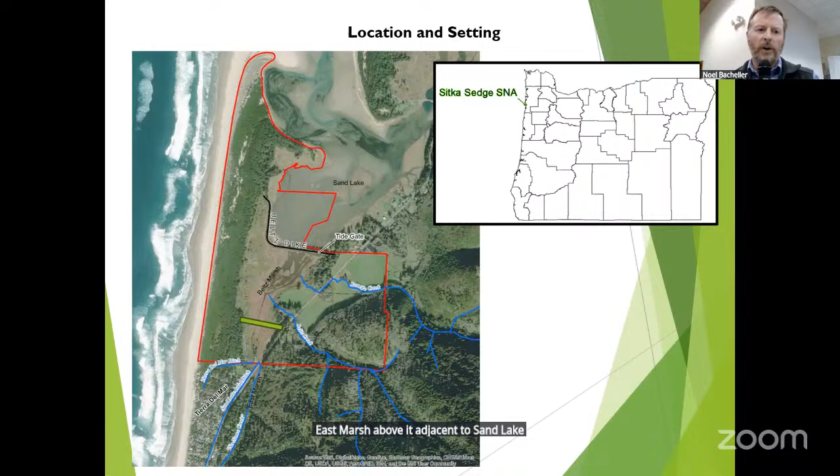Reneke Creek is the northernmost creek flowing into Beltz Marsh. Beltz Creek is the next one down. No Name Creek here from the south. East Marsh above it, adjacent to Sand Lake Road. Tierra del Mar Ditch running along Sand Lake Road through Tierra del Mar, and again up here on the north end of Tierra del Mar. The community of Tierra del Mar is to the south of the red park boundary, and Sand Lake Estuary is to the north.

Now if I can get it to move.

Okay, on this slide, this is the existing tide gate in the 1930s vintage dike. The opening of this concrete box culvert is about 4 foot by 4 foot, and it has a vertical hinged tide gate. This tide gate is missing all of the boards, so water is able to rush through here like crazy. The amount of water that flushes through during a high tide or a receding water event from stormwater behind the dike is very fast because of how small this hole is in the dike.

It's like a fire hose. It's causing all kinds of eddies and bubbles and foam. What you can see in this picture on the bottom is that these eddies, because of the excessive speed of the water, have eaten away at the inside of the dike. The dike used to go all the way out here to these wing walls, and it's been eaten away mostly in the last 20 years since the boards on the tide gate flap started to fail.

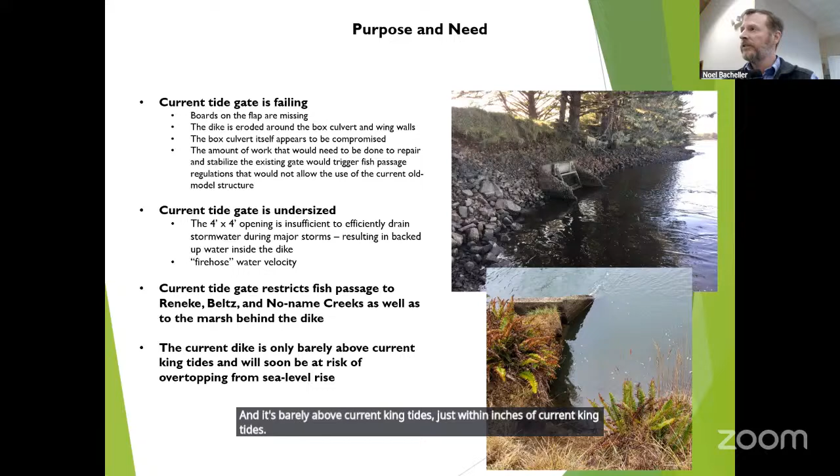So what has been done over the years? I'm not going to read all of these things here, but a lot of work has been done in the last 11 years on this property in general, and specifically also looking at what the options are for dealing with the situation with the failing dike. The property was acquired in 2014, and shortly thereafter a lot of planning started, including assessments of habitat, recreation needs, scenic resources, cultural resources, everything under the sun. We really found out early on that there was a real strong need for hydrological analysis.

So in 2016 through 2019, we had two separate highly detailed hydrological studies take place that characterized how the water flows inside and outside of the dike, what the effects would be under different alternatives, and how to weigh those alternatives against each other.

In 2020, we made a decision to look at the setback dike as the preferred alternative. And then 2020 kind of pulled the rug out from under us. We had no funding for a while there, and we quickly forged this relationship, a great relationship with Tillamook Estuaries Partnership, to look for other ways of funding the project and continue to move it forward. Tillamook Estuaries Partnership was able to receive grant funding that allowed them to pick up the pieces and start to move forward with the planning.

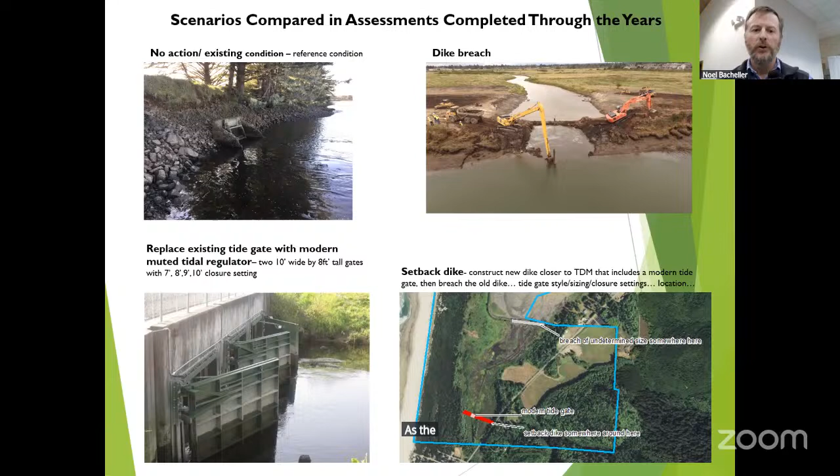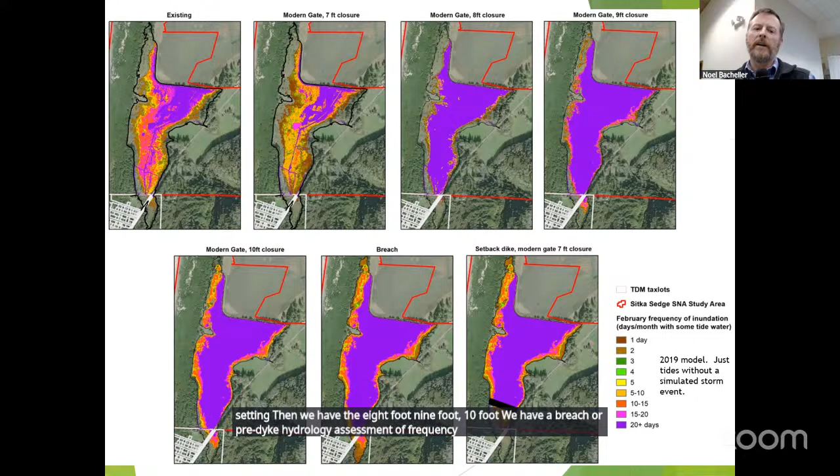In the upper left is the existing condition, then the modern tide gate with a 7-foot closure setting, or 'toilet float' closure setting. Then we have the 8-foot, 9-foot, and 10-foot settings. We have a breach or pre-dike hydrology assessment of frequency, and then the setback dike here, represented by this black bar.

The colors are a little hard to read, at least on my screen, but the green line is the existing condition, the blue line is the outside of the dike, or the breach situation, and the truncated ones—the red and maybe purple—are the modern tide gate and setback dike alternatives. The blue shading down here is a major rainfall event, something like a 100-year rain event—a pretty significant storm—and these tides are also pretty tall.

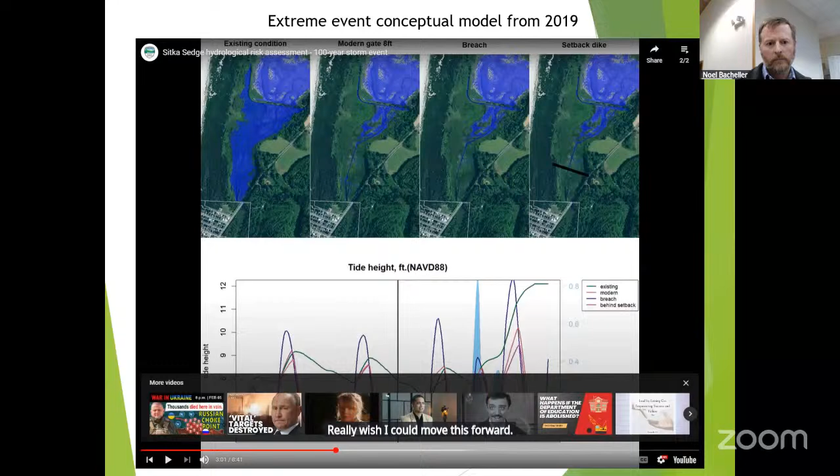Really wish I could move this forward. Well, we can demonstrate it before. I'll talk about it as it continues to move. I'm sorry, everyone, I'm not able to move it forward because of the YouTube portion here.

But now watch this tide here. This is a 10.5-foot tide. Notice that the maximum penetration into private property is highest in the breach scenario, and it's attenuated by both the modern tide gate in the existing dike as well as the setback dike. You'll see in these scenarios that the setback dike actually improves on the hydrology, or the amount of water that reaches Tierra del Mar, significantly relative to the modern tide gate scenario.

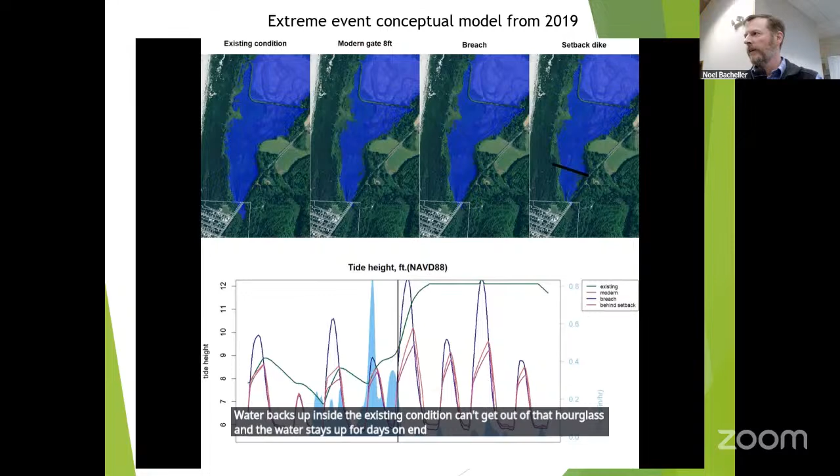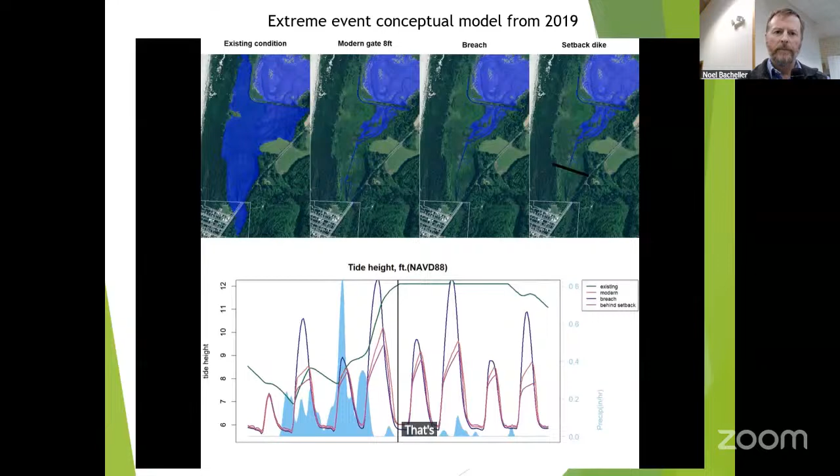Again, once we hit this major 100-year storm event, water backs up inside the existing condition, can't get out of that hourglass, and the water stays up for days on end, sometimes overtopping Sand Lake Road at No Name Creek. So here's the 12.2-foot tide. You'll see this penetration up into private property near Tierra del Mar was maximized under the breach, lesser in the setback dike than in the modern tide gate with an 8-foot setting. That's really all we need to say about that. You can watch that video on YouTube as well.

So with that, OPRD's sideboards and goals for this project are fivefold. First, the design should result in virtually no increase in stormwater, tidewater, or elevated groundwater on private properties in Tierra del Mar. Second, it should result in meaningful improvements to the estuary and fish habitats inside the dike. Third, it should restore fish passage to the mouths of Reneke and Beltz Creeks. Recreational access across the marsh should allow visitors to see the marsh up close, reach the beach, and enjoy the diverse coastal environments in between. And the design should route Reneke Creek to the marsh in a natural way, not in a channelized ditch. It's currently in a roadside ditch, and we'll get to that.

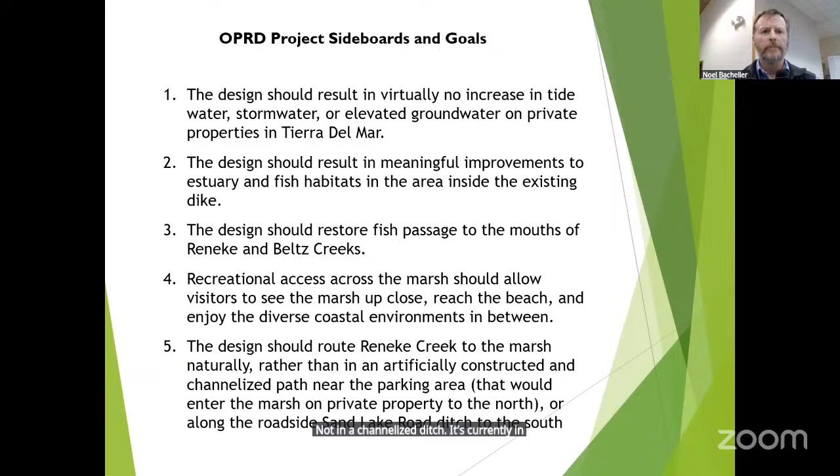So a brief summary of the pros and cons of each alternative. The no action alternative, do nothing: there are no pros to this. The dike is failing, and leaving it alone is not a good idea. The second alternative, dike breach, would have a very high estuarine benefit for fish and so on, but it does not meet OPRD goals because it would result in more surface water on private property. So that one is out.

The third one, modern tide gates in the existing dike, has a moderate level of fish benefit and moderate estuarine restoration benefit, but not as much as the setback dike alternative. The setback dike alternative offers the best approximation of a win-win for both protecting the community and private property, and also providing for unfettered fish passage to Beltz Creek, Reneke Creek, and for juvenile fish to move throughout the system in the area north of the setback dike.

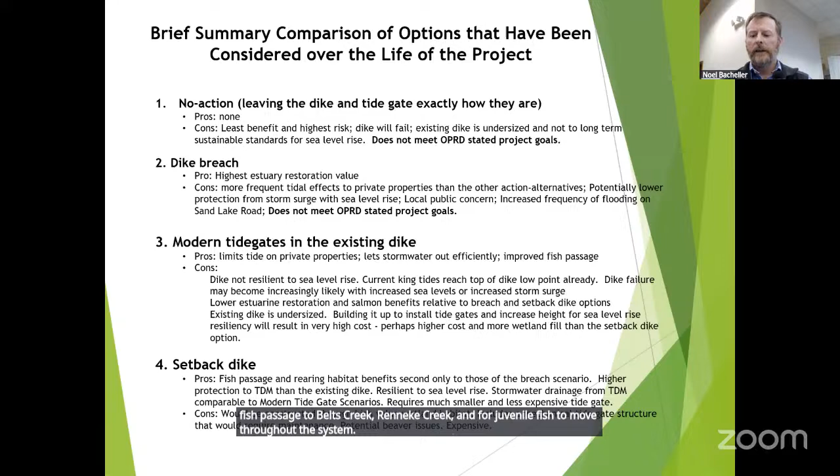In 2020, the state parks leadership, after hearing testimony from the technical team in 2019, held a series of four meetings in which representatives for various resource interests like fish, neighborhood and community infrastructure, engineering, and public works were involved. That group heard testimony and assessed wide-ranging impacts of each alternative to try to provide a good picture of which one really makes the most sense. Shortly thereafter, we met with the Tillamook County Commissioners and the Oregon State Parks Commission, and then later with the Oregon State Parks executive leadership.

Ultimately, executive leadership of state parks selected the setback dike as the alternative to pursue moving forward. This decision was made in the spring of 2020.

Shortly thereafter, we received a letter of support to aid in getting grants from the Tierra del Mar Community Association and started to try to move this forward through design. And of course, COVID hit, funding fell apart, and we lost some momentum.

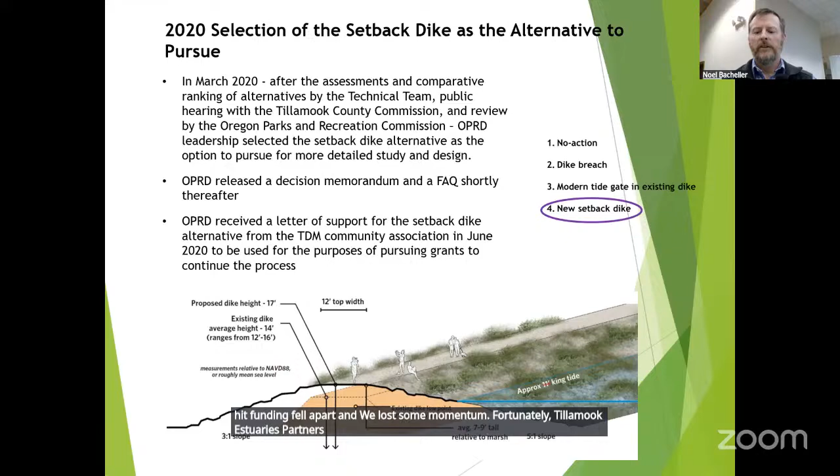Fortunately, Tillamook Estuaries Partnership was able to come to the rescue and really pick up this project and move it forward. After 2020, once Tillamook Estuaries Partnership came into the program, they were able to get a grant and hire a consultant, Environmental Science Associates, and you'll hear from Hunter soon on the different elements of design that could be incorporated into this project.

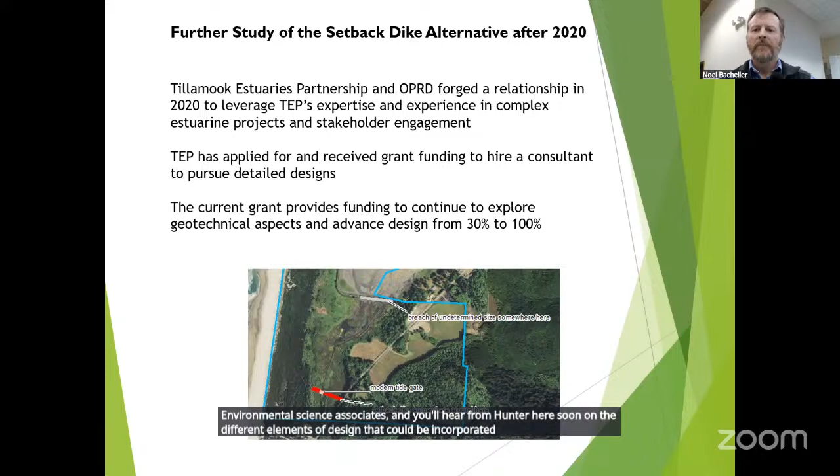To get to those in a basic sense, this slide is looking south towards Tierra del Mar from Sand Lake, and it shows an array of potential setback dike locations. It was necessary to assess a bunch of different options to figure out which one worked best. You don't know off the top of your head which one's going to work until you model it and try it. So there were an array of different options assessed, ultimately ending up with a selection you'll see in a coming slide.

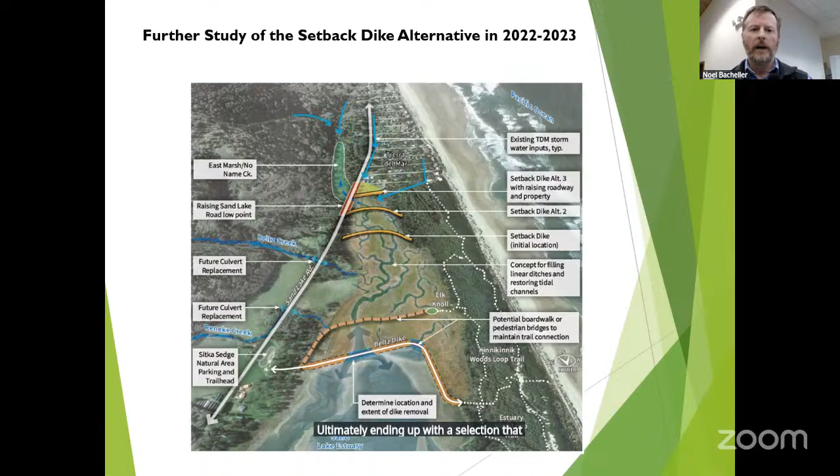Also, as part of that, Environmental Science Associates and Tillamook Estuaries Partnership did an assessment of surface water and groundwater issues in the community of Tierra del Mar. This is outside of OPRD's scope, but it may be of interest to members of the community. It's available as a resource for community members to look at and work towards potential partnerships to do something about these low topographic areas with no positive drainage in Tierra del Mar.

This is the process I was referring to earlier of trying to figure out exactly where the setback dike should go. I've been calling this tapping on the wall to find the stud. Is this the right spot? Not here. Is this the right spot? No. You keep going until you find one that actually meets your project goals.

In our case, the project goals we're really looking for are both minimizing the size of the setback dike, how big of a footprint it has on the land, as well as maximizing or having a sufficient basin size behind the setback dike for stormwater storage in the times when the dike has to be closed.

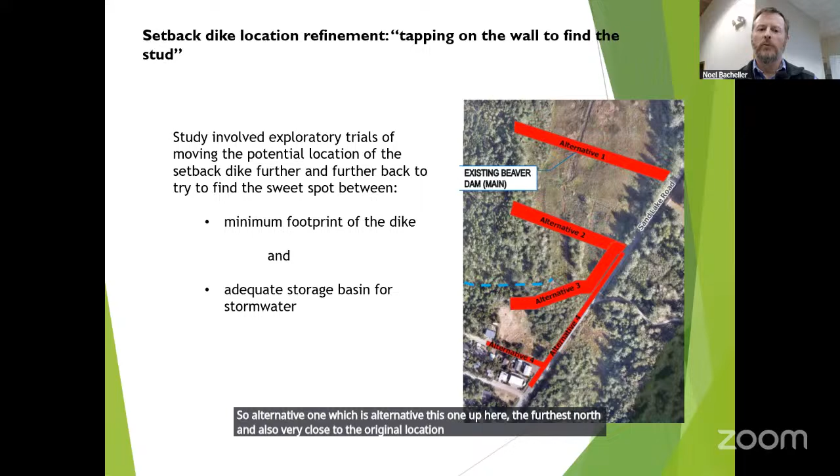So alternative one, the furthest north, and also very close to the original location assessed in 2019 and 2020, is the only one that meets the goals. It's got more than enough basin size to store stormwater, and it's as far south as you can go to minimize that footprint size. It also allows unfettered fish passage access to Beltz and Reneke creeks, and maximizes the amount of estuarine restoration that can happen north of the setback dike.

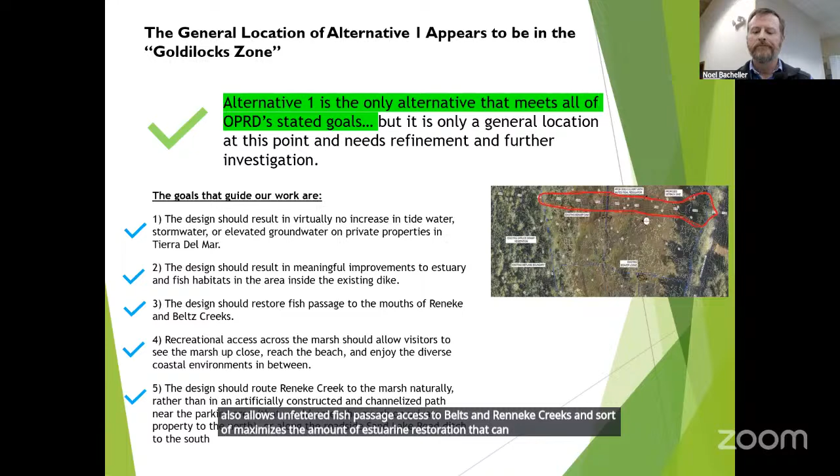So the effects on habitat are manyfold. The setback dike itself is about a 1.5 acre footprint structure in the alternative one location. That's about as small as we could get it using this approach of finding that sweet spot between sufficient storage basin and moving it south.

The project would restore about 70 acres of natural estuarine conditions north of that setback dike, to the ecology that would have been present there prior to the 1930s when the Beltz dike was constructed. About 78% of the habitat behind the historic Beltz dike would be restored, and 85% of the marsh within the state park boundaries would be restored to natural estuary.

Higher tides along the north of the setback dike would also provide fish and aquatic wildlife foraging and rearing habitat. So it's not all about fish passage, it's also about the habitat itself north of the setback dike. And that low salt marsh and marsh habitat that's natural estuary north of the setback dike is really essential for juvenile fish.

And lastly, there is some thinking around natural estuaries being more resilient to sea level rise. The sediment that comes in with incoming tides gets deposited in layers over time. That deposit of sediment allows the marsh to grow upward as sea levels increase.

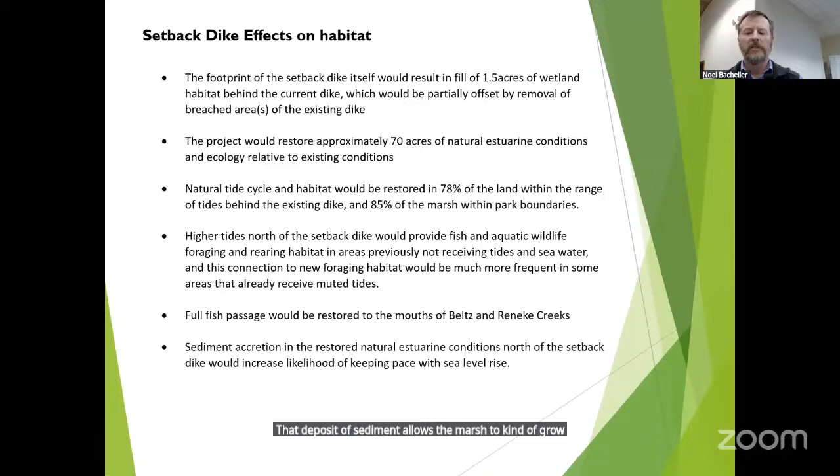In terms of the changes on habitat present inside the marsh right now, this graphic shows the types of marsh and types of vegetation that would be expected under the existing condition, as observed in 2016, versus in the setback dike situation. So what we see here in this light colored green is freshwater marsh, and this pink color is high salt marsh. And then there's some scrub shrub wetland here in blue and forested wetland in green.

You'll see that with the breaching of the exterior dike, the landscape really shifts more towards the historic condition, which was low salt marsh with high salt marsh and freshwater marsh pushed more to the edges. When the dike and tide gate were fully functional, originally in the 1930s up until the 1990s, this area didn't get very much tidewater, so it transitioned to a freshwater system instead of a saltwater system. Now with the breach of the exterior dike, that would return to more of a saltwater habitat.

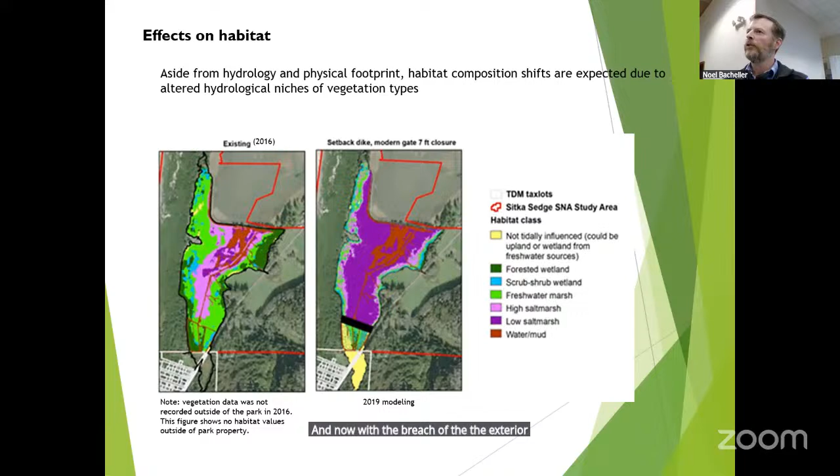And just in another way of viewing that, you can see the winners and losers on these different habitat types here. Low salt marsh is a big winner under the setback dike condition, and the freshwater marsh decreases because there's more salt water as a result of the breach in the exterior dike.

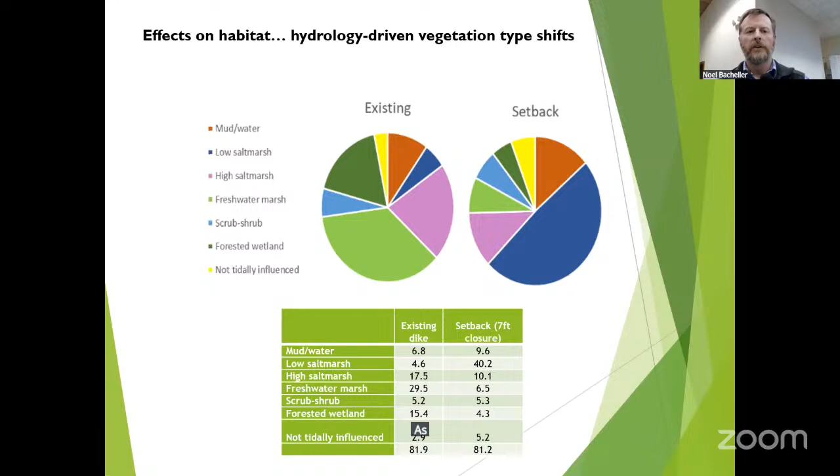In terms of effects to private property, really the take home here is the setback dike alternative decreases the amount of surface water that would reach private properties on the north end of Tierra del Mar significantly, both over the pre-1939 dike construction and relative to existing conditions. And this is because of that hourglass effect.

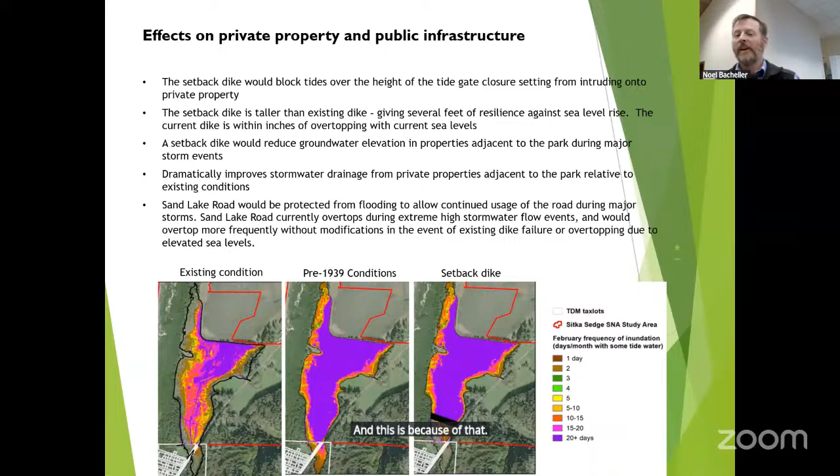So also, in some ways, the construction of the setback dike and breaching the exterior dike is self-mitigating, in that the green areas here would be estuary gain. If you look at these hydrographs at the bottom, these curves are showing the height of the tide. The blue is outside of the dike, and the orange is inside of the dike under current conditions. What you see is the tide doesn't reach as high under existing conditions, but under a scenario with a breach here and a setback dike here, these green areas would be re-wetted by allowing more water to get in. That kind of compensates for the loss of the 1.5 acres of habitat that would be lost from the placement of the setback dike here.

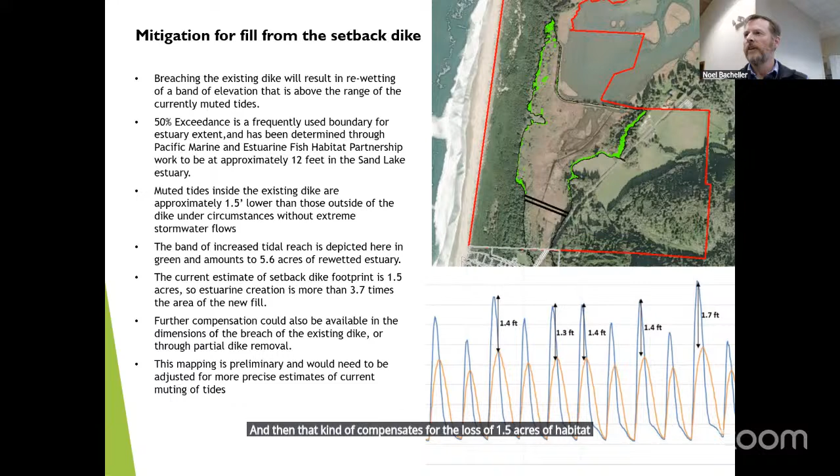So, next steps. Geotechnical boring is key to figuring out how and where to construct, and the details of the engineering for the project. That's been something we've been trying to get in place for quite a while now. We need to take the designs from 30% all the way to the finish line. We also need to find out more about permittability — there are a lot of regulations around this kind of thing, as you can imagine, and a lot of things that need to be figured out about how and when to apply for the various permits and what the hurdles would be to move through that permitting process.

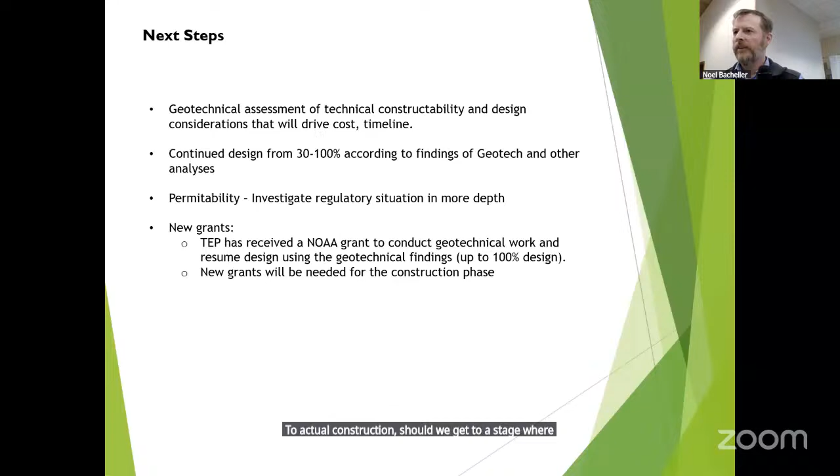And we need new grants. We currently have grant funding to get us to 100% design, but we don't have any money yet for implementation. So we'll be applying for funds to take this through to actual construction, should we get to a stage where we're permitted, the designs look good, and all of that.

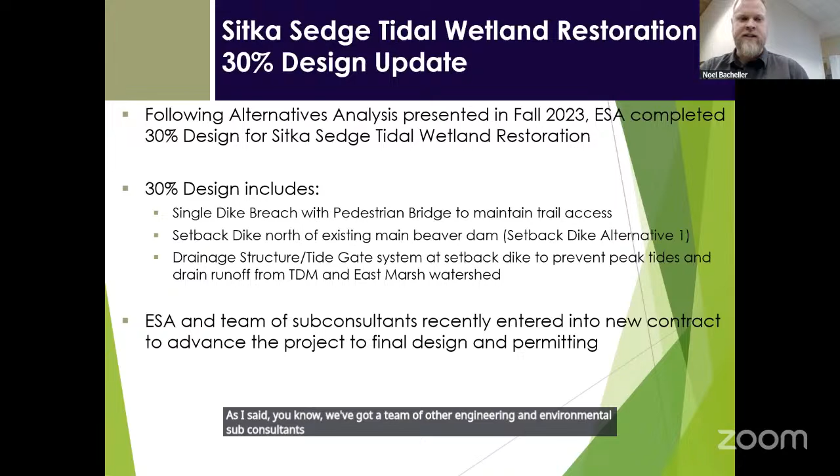Breaching the dike, in order to maintain trail access—I'm sure a lot of you know this is a very popular trail, great access to get out to the beach and the incredible trail network in the forested dune area—while breaching the dike, we're proposing to span the breach with a pedestrian bridge. I'll show you a bit more detail on that in just a moment.

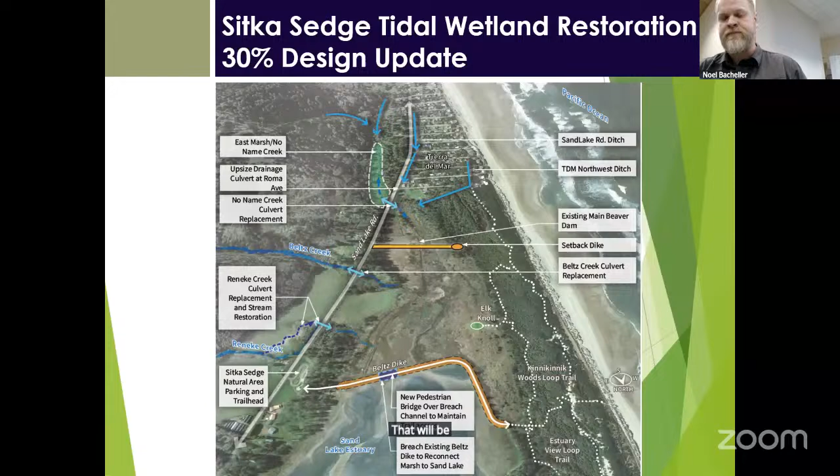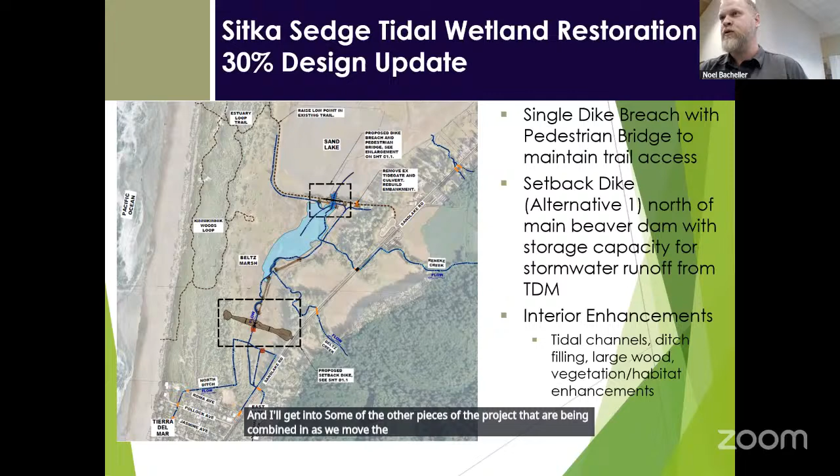This is another view of kind of the same thing, starting to get into our construction drawings that we're developing, from the 30% plans. Again, at the north end, showing the dike breach and pedestrian bridge, and the setback dike across the south end of the marsh. Those are really the two main elements of the project at this point, and I'll get into some of the other pieces of the project being combined as we move the entire project forward through permitting and final design.

Zooming in here at the dike breach location: the existing dike, the trail we all walk on now to view the estuary to the north and the wetland to the south. We're showing here about a 200-foot wide breach excavated through this dike.

What we're looking at in the plans here are the grading contours of how we would excavate through that earthen embankment, creating a new channel to convey water in and out of the marsh, really trying to restore a historical channel that used to connect Beltz Marsh to Sand Lake.

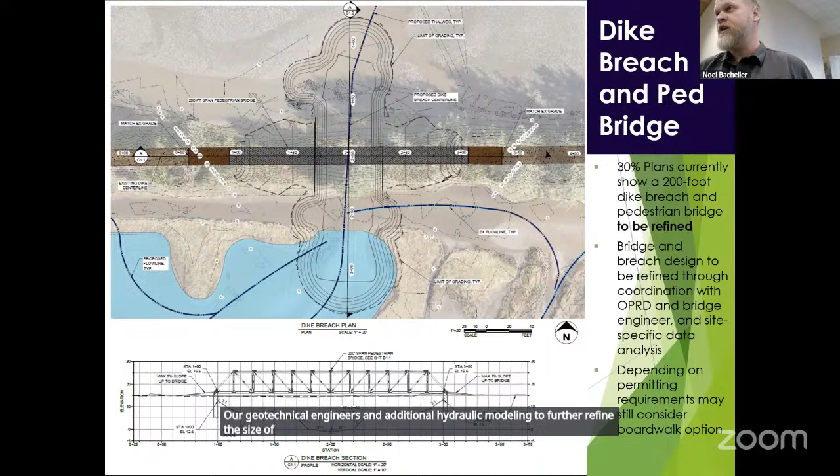You can see at the bottom there, that's a profile view along the dike showing this 200-foot span pedestrian bridge. In the next phase of work, we're working with our structural bridge engineers, Oregon State Parks, our geotechnical engineers, and additional hydraulic modeling to further refine the size of this breach and the size of the bridge itself.

We're considering prefabricated bridge options as the most economical approach to a bridge of this size. We've got some upcoming meetings to work with state parks about the aesthetics, the material choices, and really what do we want this bridge to look like.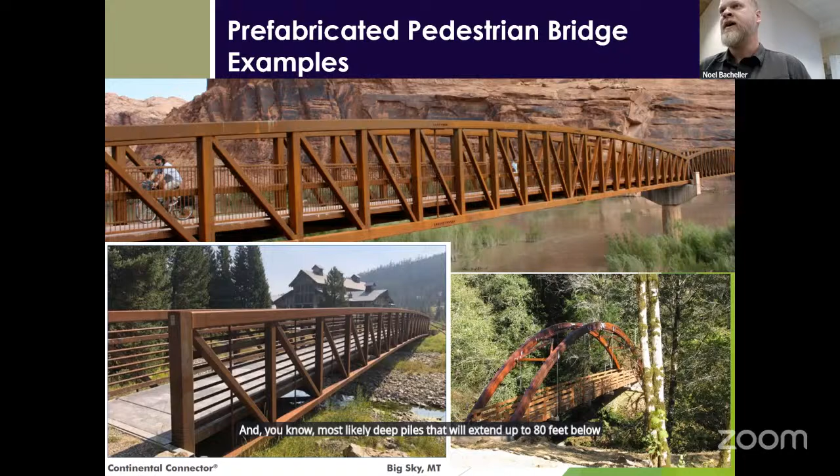And then working on some of the other engineering aspects to figure out how big can it be, what are the cost trade-offs for the different sizes of bridge options, and what sort of foundation is required, the abutments that the bridge will sit on, and most likely deep piles that will extend up to 80 feet below ground to tie into solid foundation.

That's similar to the effect we see with the existing culvert, which can have a tendency to cause erosion. So that's one reason why we're looking to increase the size of that breach until we start to see that erosive effect go away.

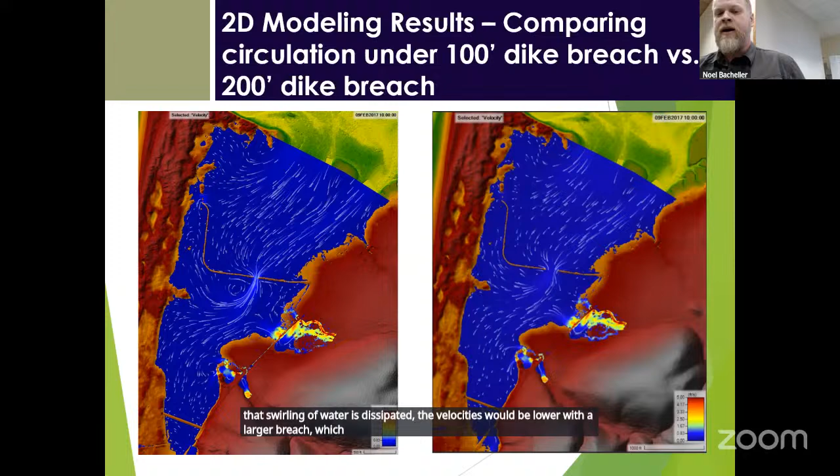On the right there with the 200-foot breach, that eddy feature, that swirling of water, is dissipated. The velocities would be lower with a larger breach, which would also lead to less potential for erosion and less need to armor the banks beneath that bridge.

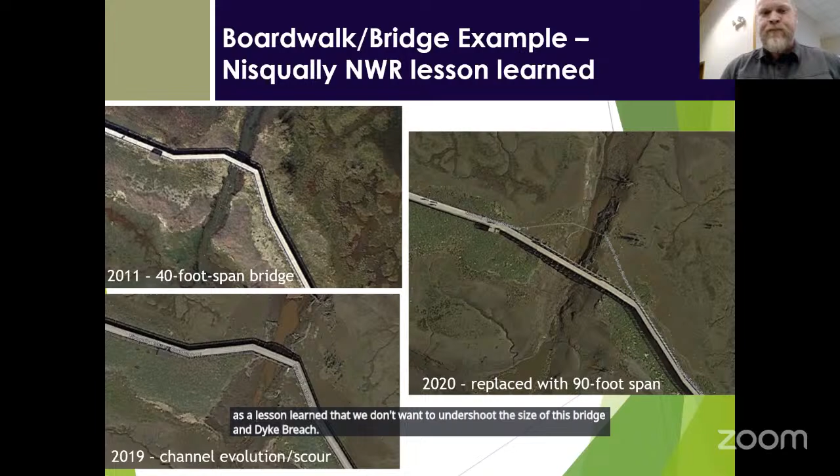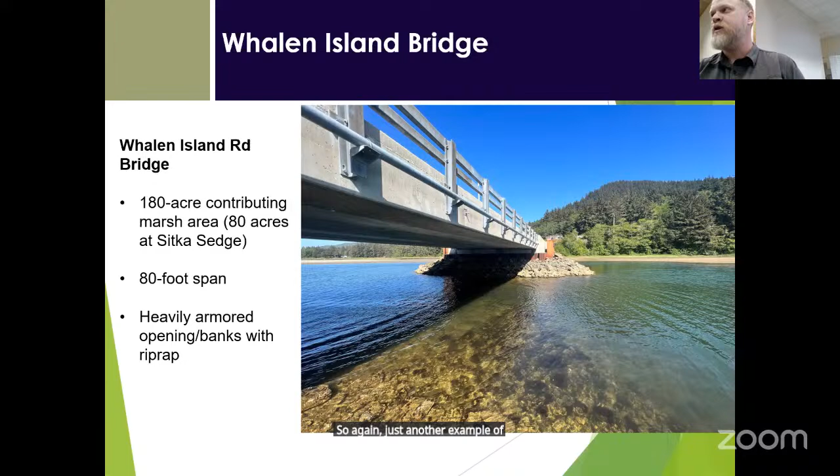So again, just another example of not wanting to undersize our bridge at Sitka Sedge.

One key feature here that really played a lot into our thinking about where to propose to locate the setback dike is the existing beaver dam. There is a prominent beaver dam out there that's been there, and it's persistent.

We have been thinking about, as Noel was showing, some other options where we push that setback dike further south. It's really in an area that's impounded by these beaver dams. So one of our ideas here is locating the setback dike not only in an area that has enough storage to contain all of the stormwater from Tierra del Mar, but also in a manner that will keep the setback dike north of that beaver dam, essentially letting that southern 10 acres stay as they are and maintain that freshwater marsh and beaver pond complex that's there.

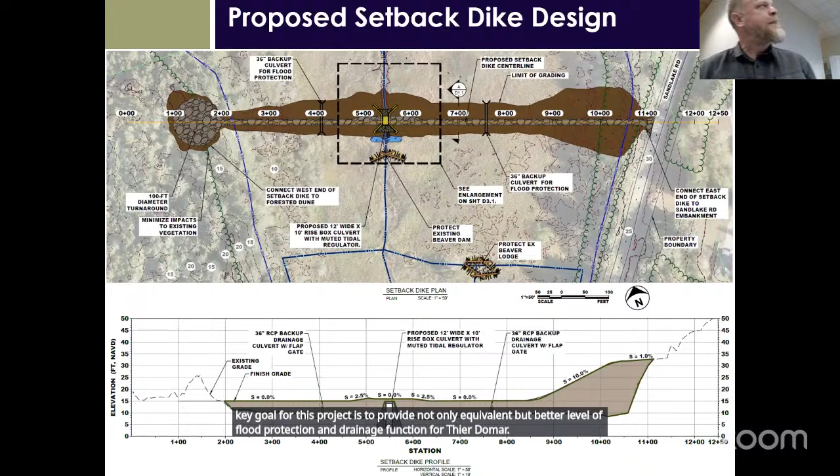Where this new earth embankment will cross the marsh, there will be a need to stabilize the subgrade, the soil that's beneath it, and prepare it in a way that will counteract some of that settlement. But again, we do expect settlement to occur, and we'll overbuild the dike to accommodate that.

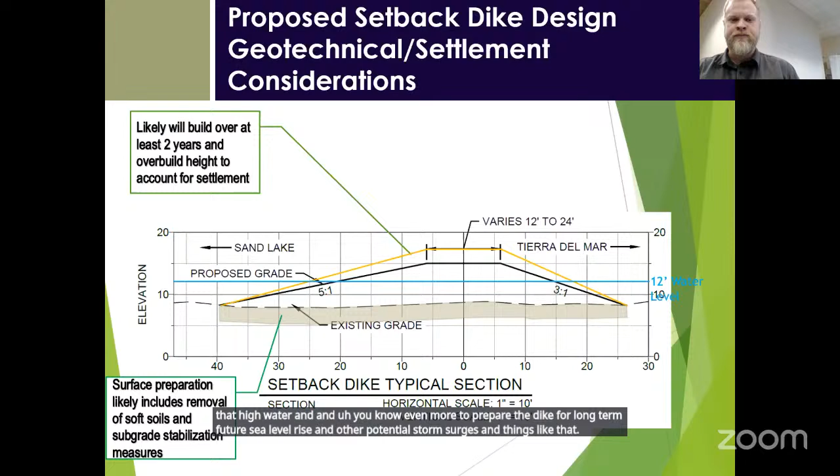And that's another consideration for us, just thinking into the future about making sure this structure stays functional. We will likely need to exclude beaver from this immediate location, likely with some sort of exclusion fencing or other methods. We're working with ODFW right now to make sure that we are meeting fish passage criteria, while also the ability to keep beavers out of this structure and tide gate to keep them from blocking it.

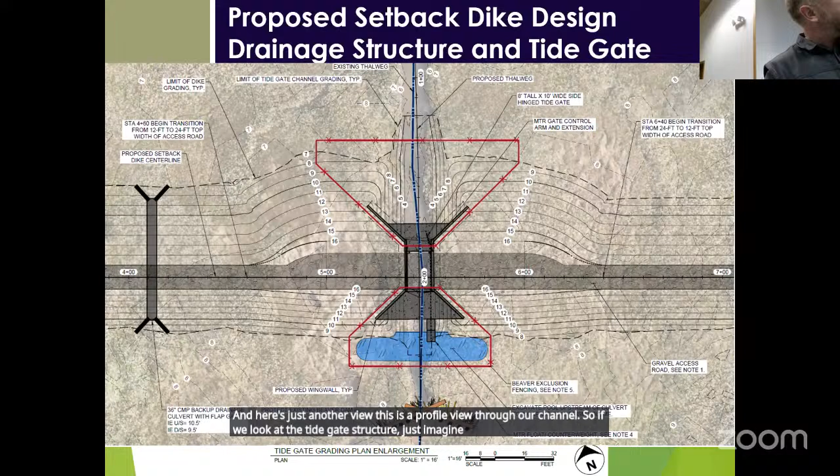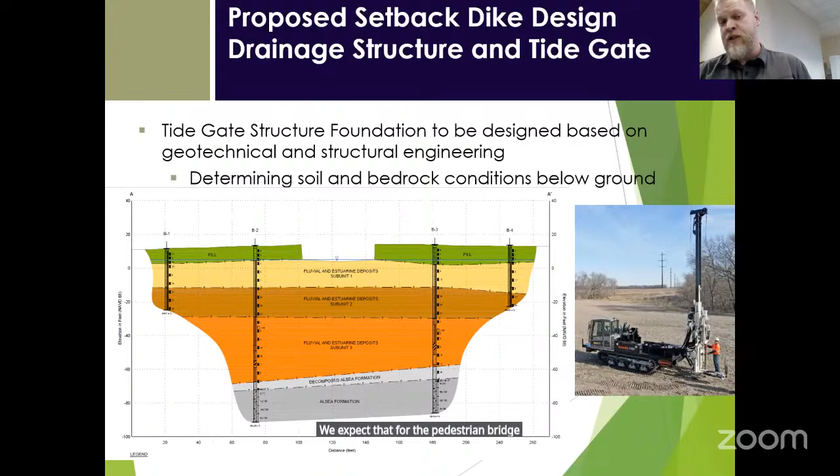What you can see here, these colored layers - the green layer at the top is fill, that was the embankment that Whalen Island Road is on. These three layers beneath that, the yellow, brown, and orange, are essentially mud deposits that have sand and mud deposits that have developed over thousands of years. Below that in the gray, that's where we start to get into rock, actual bedrock. So what this is showing, at Whalen Island Bridge as well, in order to support that new bridge, piles were driven down deep to be founded on bedrock. We expect that for the pedestrian bridge, for Reneke Creek Bridge, which I'll talk about here in a second as well.

So as I mentioned, beaver and their heavy activity and their presence right near this proposed tide gate structure is a big consideration for us. Beaver are there right now, and they will likely remain at Sitka Sedge after the reconnection. Beavers are often more thought of as being in freshwater environments, but there is a lot of growing research now finding beavers in these estuary areas and in brackish water conditions.

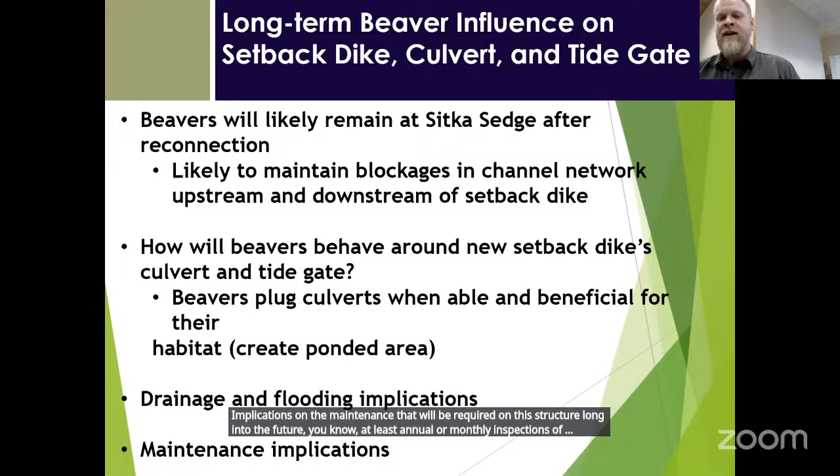And so beavers do plug culverts, as I'm sure a lot of you know, and can cause a lot of problems especially when culverts are too small and easy to block. That has a lot of big implications on drainage function and flooding of areas upstream of those blocked culverts. Not only that, but implications on the maintenance that will be required on this structure long into the future - at least annual or monthly inspections of somebody going out and taking a look and likely removing debris.

There are beaver exclusion systems that are pretty simple in some cases, where we just need to keep beaver from accessing these structures and not allowing them to carry dam building materials to block these systems.

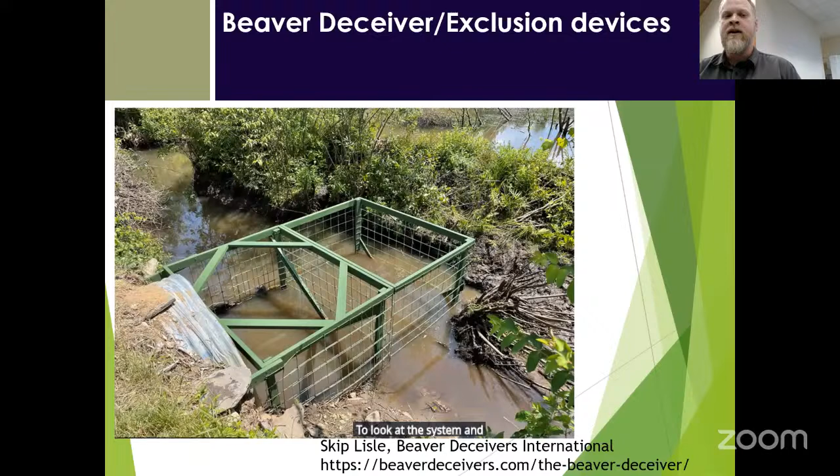This is an example of a beaver exclusion device by Beaver Deceivers International, or Skip Lisle, who's also on our team for this project. We had Skip out here back in November to look at the system, and he's on our team to work on a beaver exclusion system for these crossings.

So in addition to the big pieces of infrastructure, we're also looking at other ways to enhance habitat conditions within the marsh.

Often when we approach these projects, we see ditch networks that have been excavated through these wetlands, and a lot of the original tidal channels have been filled and used these areas as pasture. So typically we look at filling those drainage ditches and re-excavating new sinuous tidal channels.

We are considering that here, but as Noel showed a vegetation map, the vegetation out in the marsh is really high quality. While there will be some changes in plant communities with the reconnection of more salt water, getting out there to fill these ditches or dig new channels or put in wood habitat structures would have an impact on the marsh. So we're kind of trying to weigh that and balance that right now. How much do we want to get out into that wet area and do these activities? And is it worth the impact that it will cause?

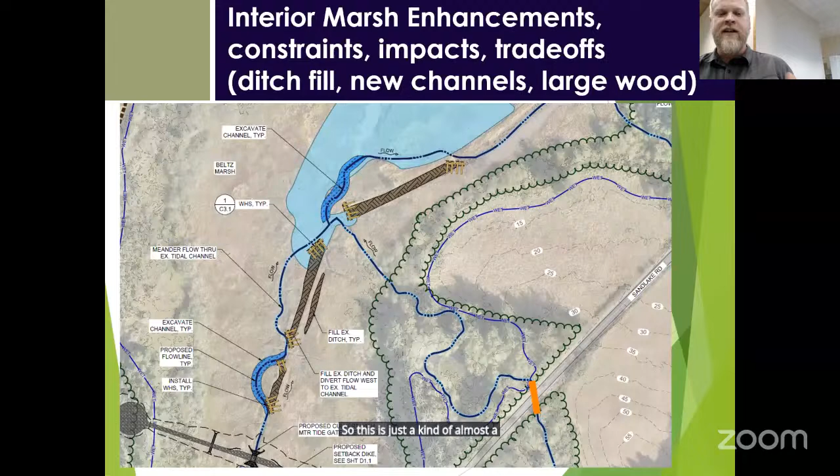So this is just almost a concept of filling some of the drainage ditches, putting in logs, root wads for good fish habitat, and trying to more naturalize the channel network that's out there.

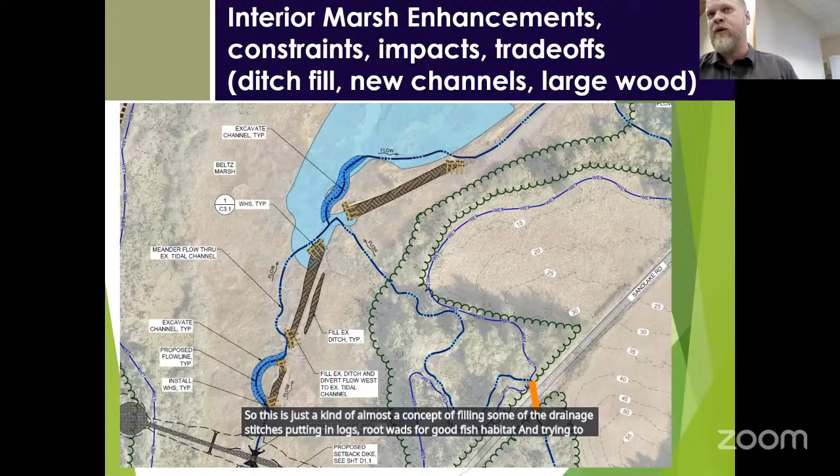So including within our design, upsizing the drainage culvert at Roma Ave on the Sand Lake Road ditch. This is the one culvert within Tierra del Mar that is within the zone of influence of tides and elevated water levels that can back up from the marsh.

With the setback dike, we will be reducing those water levels, so we won't actually see these same high water levels. But the Roma Ave culvert, like I said, is the one structure within this zone of influence, and it's kind of low-hanging fruit to replace this culvert, upsize it, and improve the drainage of that ditch.

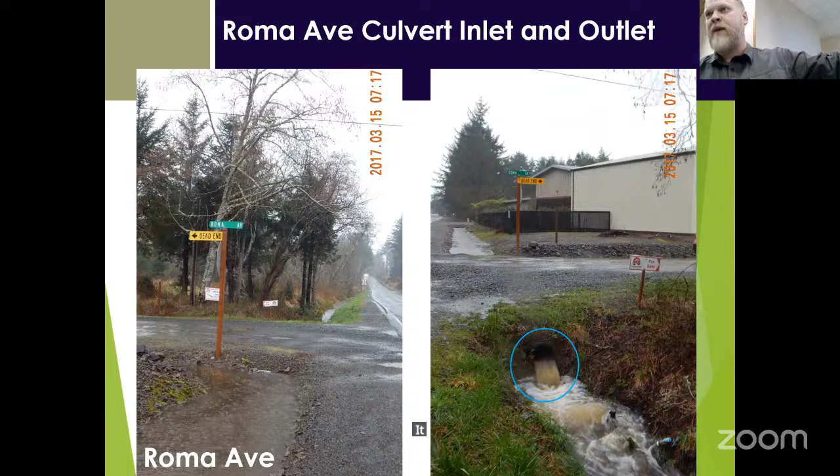This is a photo from 2017. In the two images, the one on the right is the downstream end, the outlet of that culvert, so you can see it's actually free flowing. It's not backed up, it doesn't have water backing it up, blocking it. But on the upstream end, it is impounded. Part of it could be some blockages within that culvert, or just the size of it itself not allowing that water to get through fast enough.

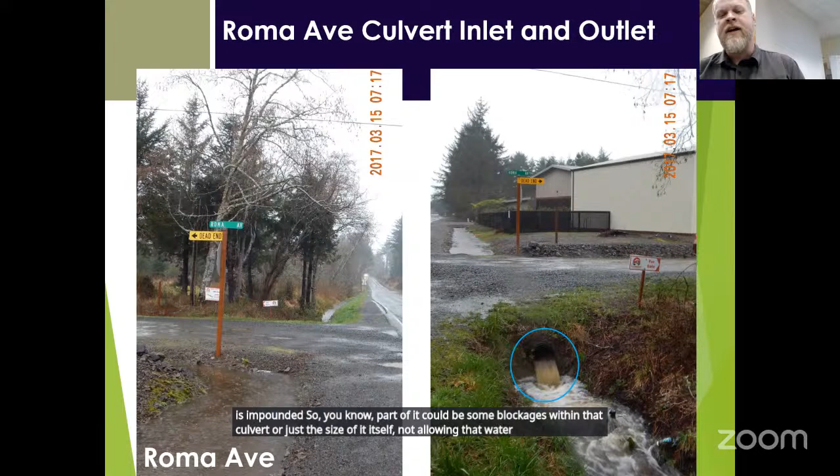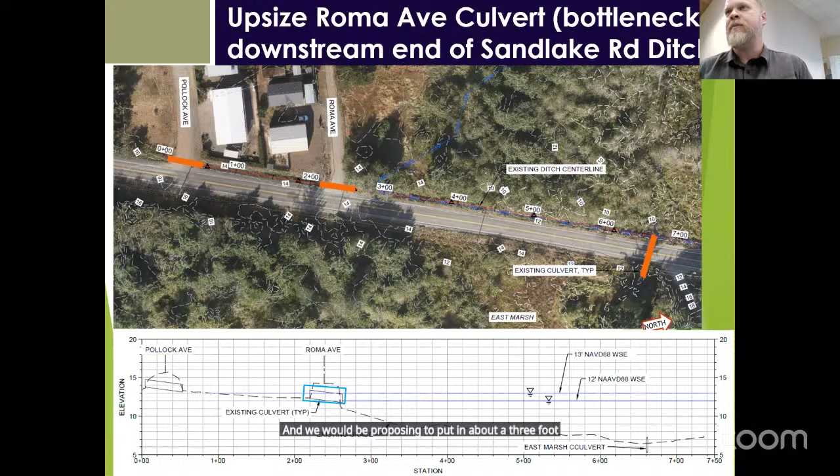All of that work I just described is part of what at that time we were packaging as the Sitka Sedge Tidal Wetland Restoration Project. This is a construction cost estimate that includes those elements: the dike breach, the pedestrian bridge, the setback dike, the new tide gate structure, upsizing the Roma Ave culvert, and other pieces as well.

Looking right around $6.5 million for all of that work. That bottom line there is a 30% contingency, and that's just because of the early stage of design that we're at right now. We're adding about 30% just to create some buffer for things to change and evolve as we figure out more about the geotechnical conditions and so forth.

There's nothing in this about removing the old structure. You mentioned to remove the old dike. The whole dike?

I guess the question was, within this estimate and list of activities, I didn't mention the old culvert that's there now and the rest of the dike. So most of that dike, the existing dike, will stay in place. We'll just create a gap or breach that will put the pedestrian bridge over. The existing culvert that's failing and having erosion around it will be removed, and that concrete structure will be taken out. The embankment will be rebuilt because that's part of the trail now. So when we take that structure out, we'll need to rebuild the embankment to make sure it's stable for the long term for the trail.

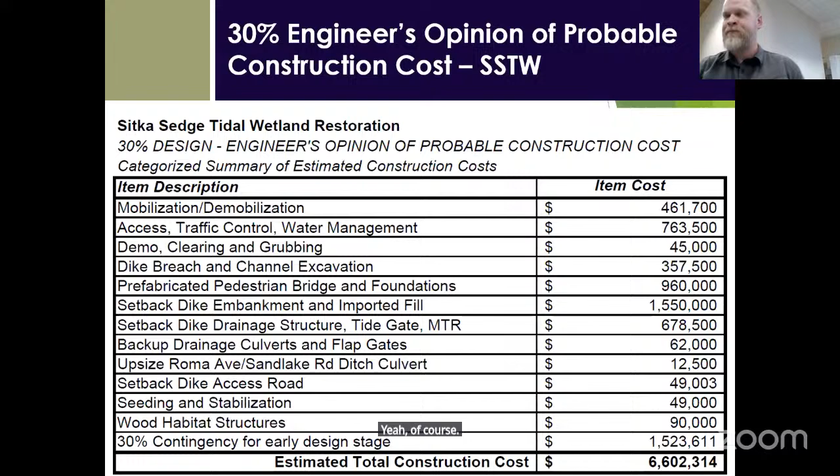Another aspect of this area, not necessarily the park itself - the Sitka Sedge Tidal Wetland Project has been fully located within the park - we've also been working with Tillamook County Public Works, and Chris Lady is here in case questions come up on this aspect, to replace the culvert crossings on Sand Lake Road.

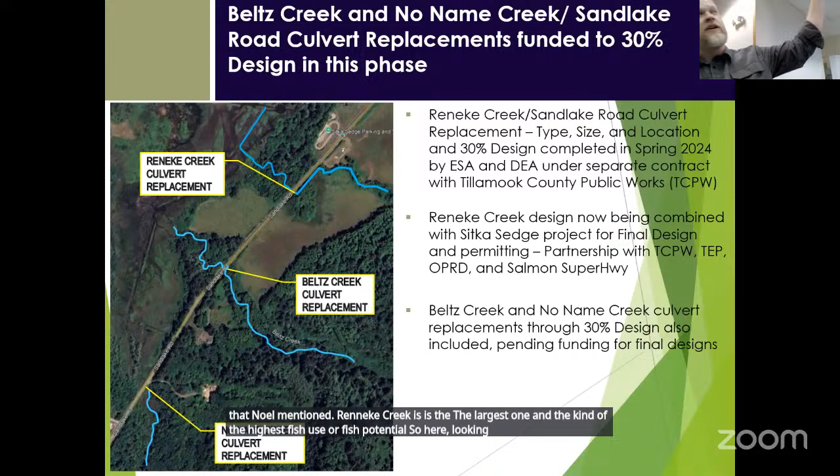There are the three creeks that Noel mentioned. Reneke Creek is the largest one and has the highest fish use or fish potential. Looking at the map, we've got Reneke Creek in the north, Beltz Creek in the center of the project area, and No Name Creek coming in from the south near Tierra del Mar.

We worked under a separate contract directly with Tillamook County Public Works to take the Reneke Creek culvert replacement to a 30% level of design. Again, I mentioned our sub-consultants - we also worked with David Evans and Associates, roadway and bridge engineers, on that phase of the project.

Now, as this project is moving forward to final design, we've combined it all together for efficiency - into a single plan set, a single package of documentation - and try to permit it all together to the extent that makes sense. There may be, as we work through the permitting process, other reasons or funding availability that allow Reneke Creek to be built first. But at this point we've combined it all together because these creeks and the wetland and all of the hydrology is so related that we wanted to analyze the whole system together.

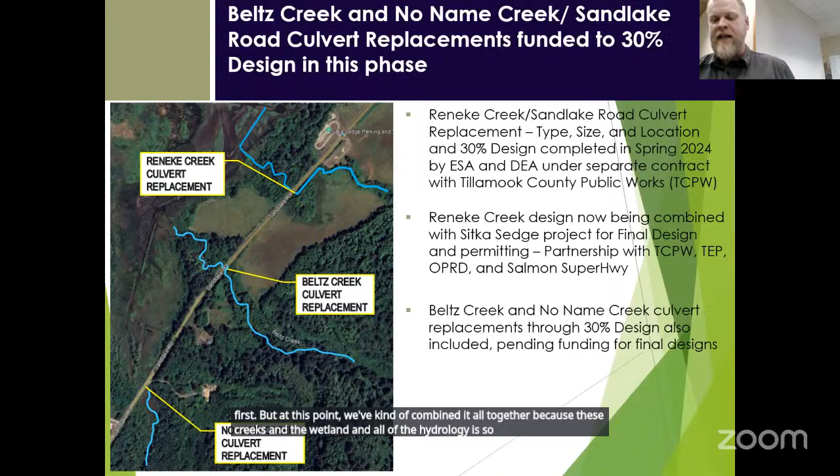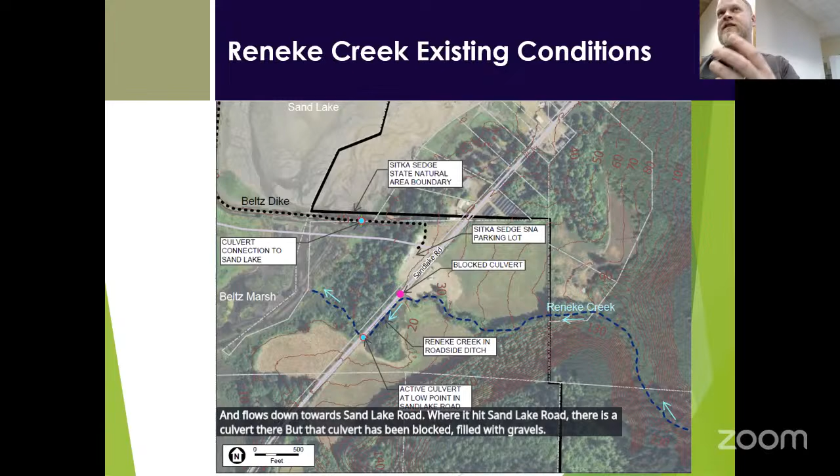Reneke Creek flows from a forested hillside to the east down towards Sand Lake Road. Where it hits the road, there is a culvert, but it's been blocked and filled with gravels. Reneke Creek carries large amounts of gravel from the steeper stream section and deposits that gravel into the creek channel, in this case completely burying the culvert that used to convey much of the creek across Sand Lake Road.

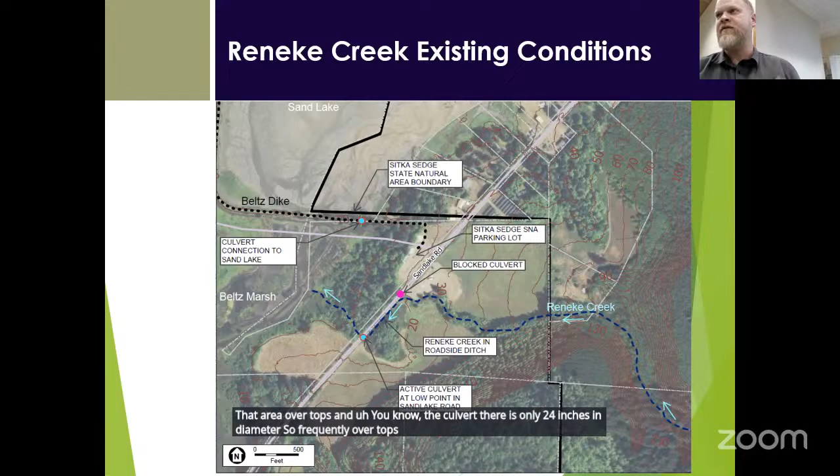Right now the creek actually flows down the roadside ditch and comes to the low point in the landscape and in Sand Lake Road. If you drive through this area, there's a pretty obvious dip location that overtops, and the culvert there is only 24 inches in diameter, so it frequently overtops and doesn't have the capacity to convey all that water. Water will overtop the roadway, and that is a driver not only for the infrastructure aspect of the project, but for fish passage as well - that very small pipe doesn't really allow fish movement into the upper portion of Reneke Creek.

So stepping back, we really wanted to see where does it make sense to replace the culvert, where do we want to put a new bridge, a new crossing structure. And so we looked back through time.

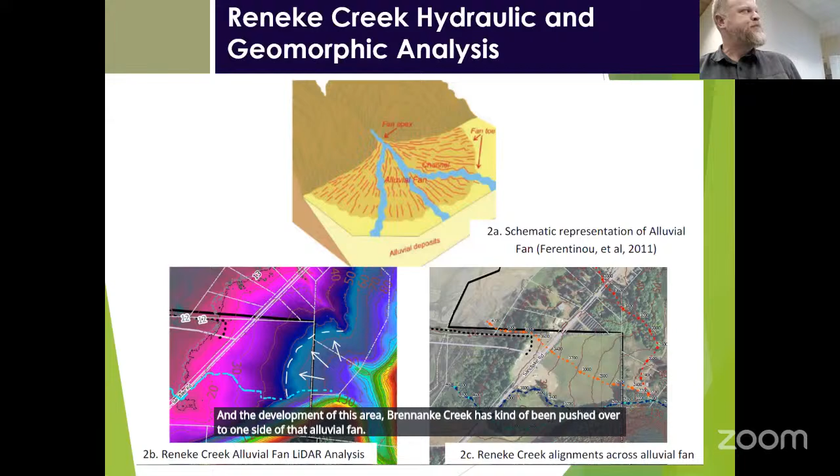As I was showing in this image, through the progression of development and clearing, Reneke Creek has further been boxed into this location.

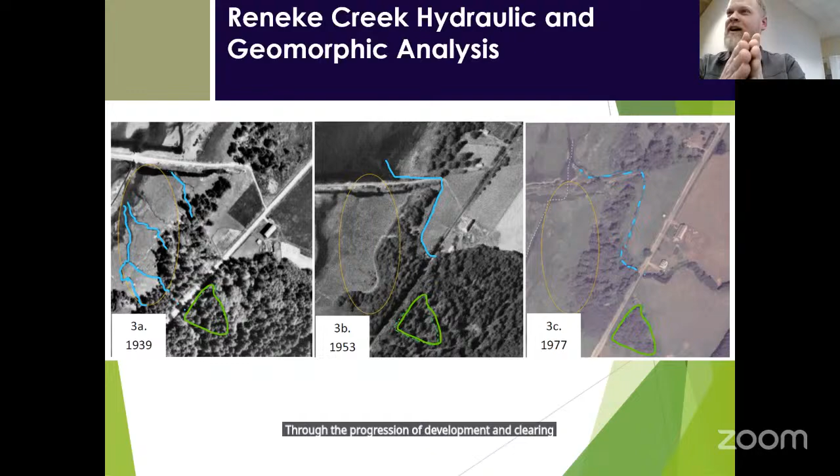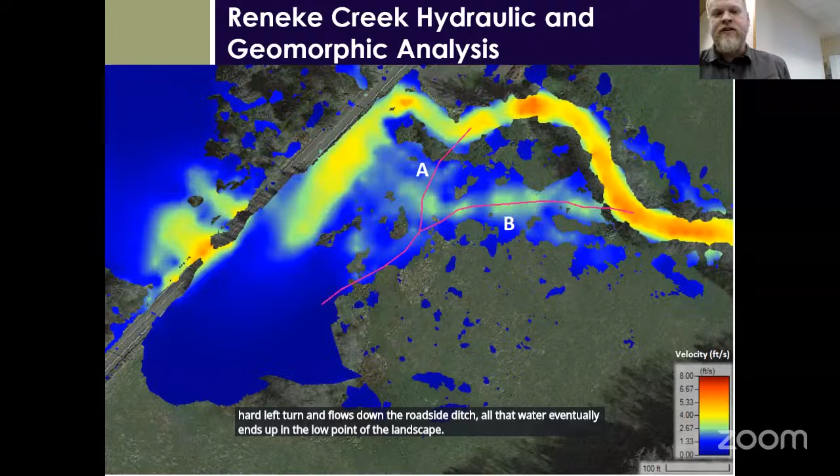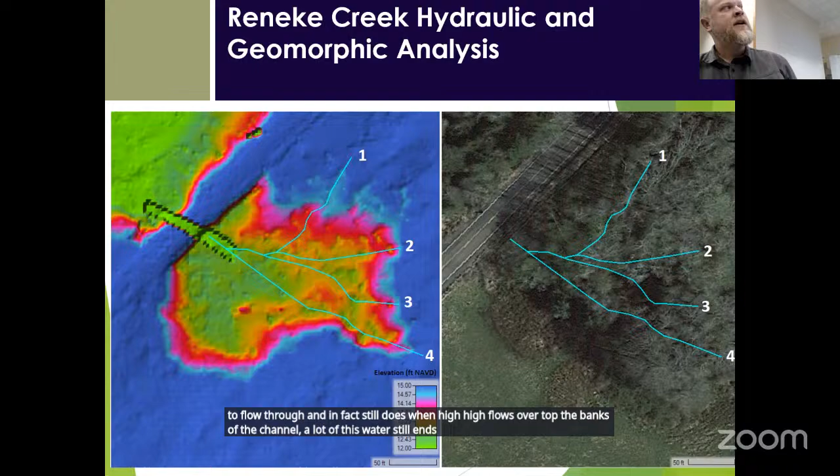So our concept for restoring Reneke Creek and replacing the culvert that's there is a combination of elements. We're trying to get that creek out of that roadside ditch and allow it to flow across this area that used to be forested, diverting the creek away from the road, revegetating it to try to recreate the conditions that were historically there.

With that alluvial fan type of feature, creeks aren't usually just in a single channel. They're usually spread out into multiple side channels, and that's something we're also going to try to recreate.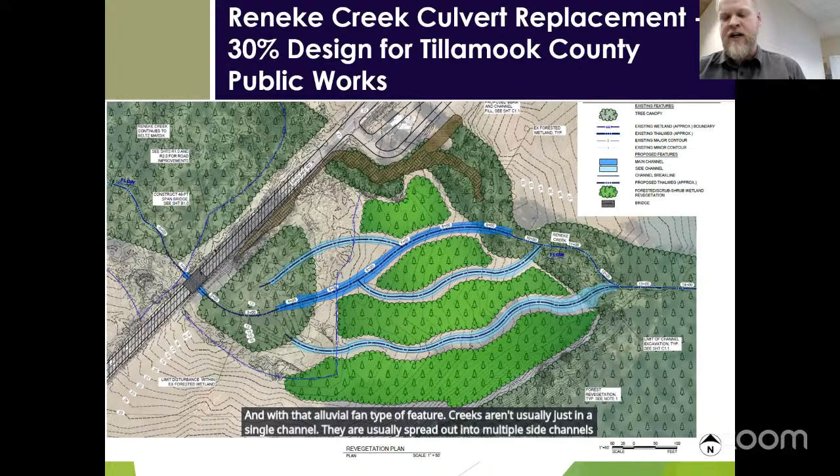Along with that, the big element here for improving access and transportation along Sand Lake Road is putting in a new bridge where that small culvert is now. This is showing that we would also raise Sand Lake Road up by a couple of feet to reduce that low point, the potential for overtopping, and just to have a more resilient road in this location.

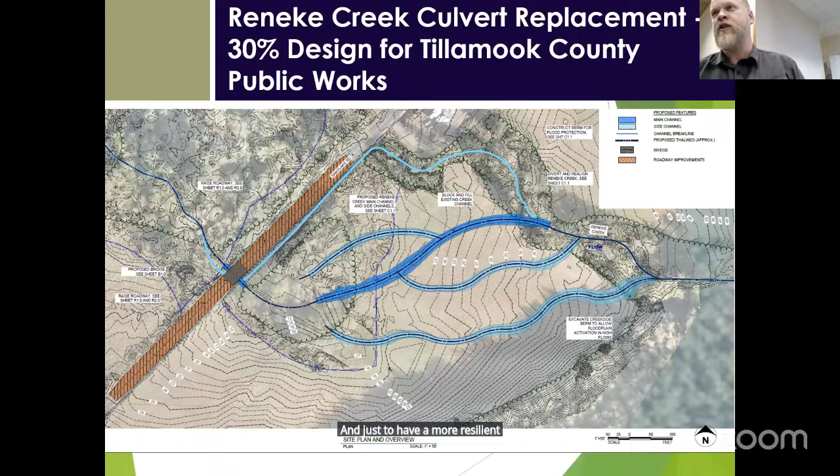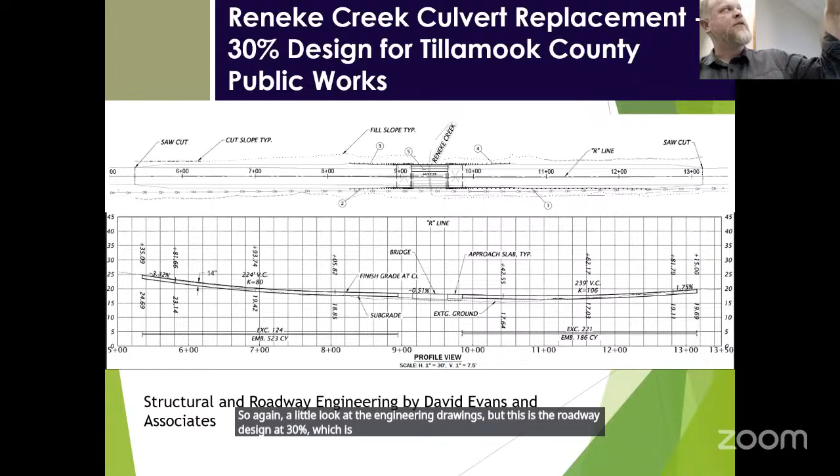So again, a little look at the engineering drawings, but this is the roadway design at 30%, showing a raising up of that road. And this is a look at the bridge itself, replacing that small culvert with a 40-foot span bridge. Quite an upsizing, not only to provide great fish passage, but also to be able to pass gravels and wood debris and prevent that from being blocked, as well as giving that freeboard, that extra vertical space there to adapt to future water levels, high flows, and debris passage.

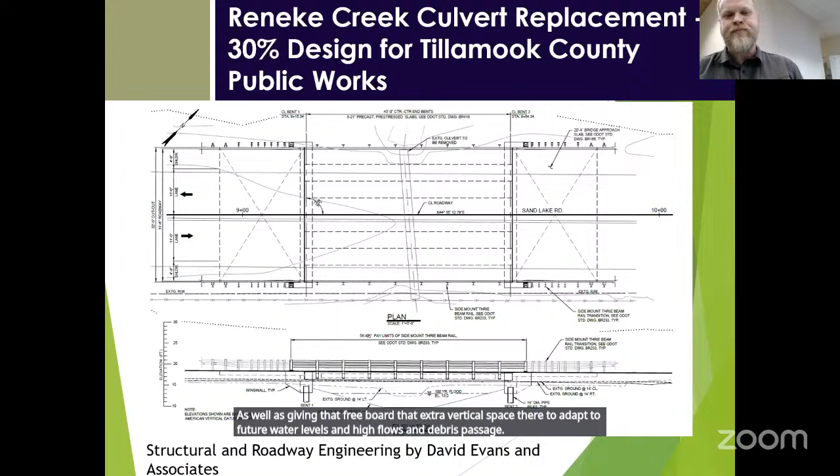So this being a separate project, all of that work I just described—the raising of the road, the new bridge, and the stream restoration work—we're estimating at about $3 million. The county has applied for Federal Highway Administration grant funding in partnership with Trout Unlimited, Tillamook Estuaries Partnership, and the Salmon Superhighway Partnership.

And oh yeah, I guess that's the end of the content. As I said, we've continued to work on the project since November when this presentation took place, and we are now starting designs on Beltz Creek and No Name Creek culvert replacements, as well as really engaging with the permitting agencies, advancing this project more towards a 60% design and preparing to submit permit applications.

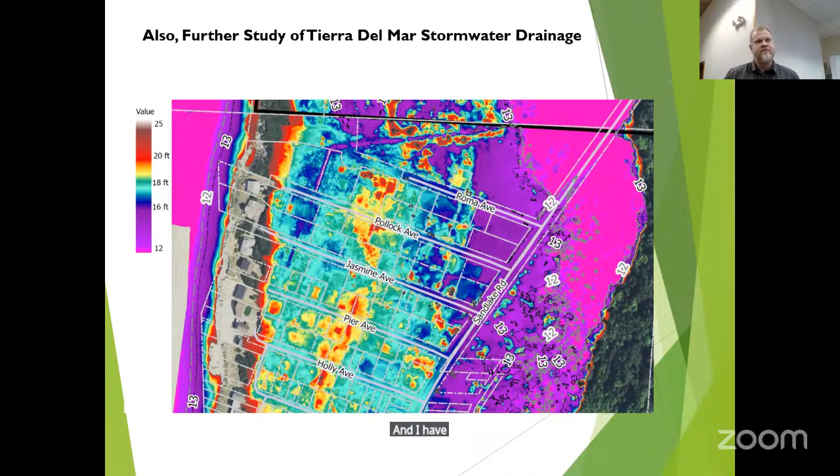Thank you for your time and thank you for the presentation. One of the questions that crosses my mind is, I've accessed Sitka sedge a number of times, and I have looked dutifully for this plant and have never found it. I'm curious, will it survive this change? So sometime in the future, I might find it. What's going to happen to the plant Sitka sedge?

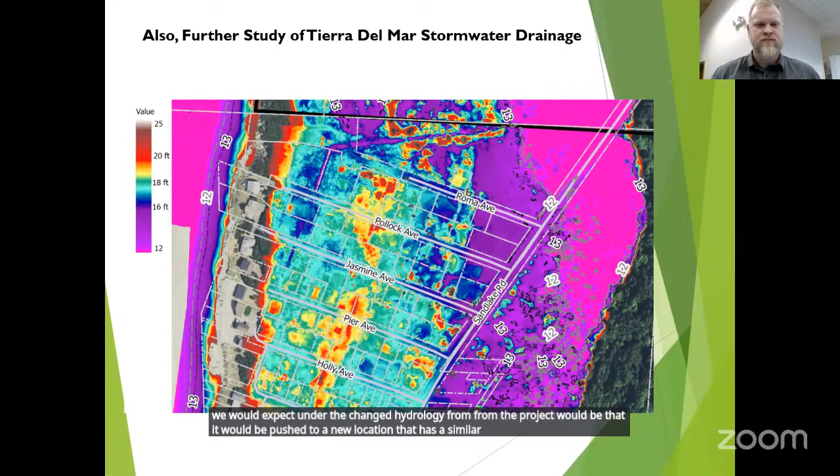Yeah, I can answer that. Right now its distribution is patchy out there in the marsh, and you have to go out there pretty much in rubber boots to find it, so it's not easily accessible. But what we would expect under the changed hydrology from the project is that it would be pushed to a new location that has similar hydrology. All of these plants occur, I'll call them in bathtub rings, at a certain elevation zone in the park. So what is now a Sitka sedge spot niche in the habitat will shift upwards as the tides shift upwards, which will also make it more accessible from the edges. You should be able to find it more easily without having to trudge through the marsh in hip boots.

Thank you. Being a longtime salmon fisherman, I've always been interested in the decline of salmon in the Northwest. And obviously this is a typical case here, that we took a couple of streams that were very productive for coho salmon before my time and turned them into ditches. Have you given any thought to whether we'll ever get coho salmon going back up Reneke and the other creeks that we're talking about restoring here?

Yeah, absolutely. That's really a big driver for this project, fish passage, fish access into these habitats. The dike breach—well, starting with the existing culvert that's there now, especially when it had a tide gate on it, that almost fully blocked salmon, coho, from entering the marsh and then accessing the creeks. So the first step along that pathway is relieving that constriction, removing that existing culvert and replacing it with the large breach. That will allow fish access from Sand Lake into the marsh as a whole. And then, as I was just describing, the plans for Reneke Creek itself, which has the highest potential for fish use and where we do see some adult salmon making it to now—that large bridge, that 40-foot span bridge, is also really targeted at improving fish access into Reneke Creek itself. So yeah, big goal for the project.

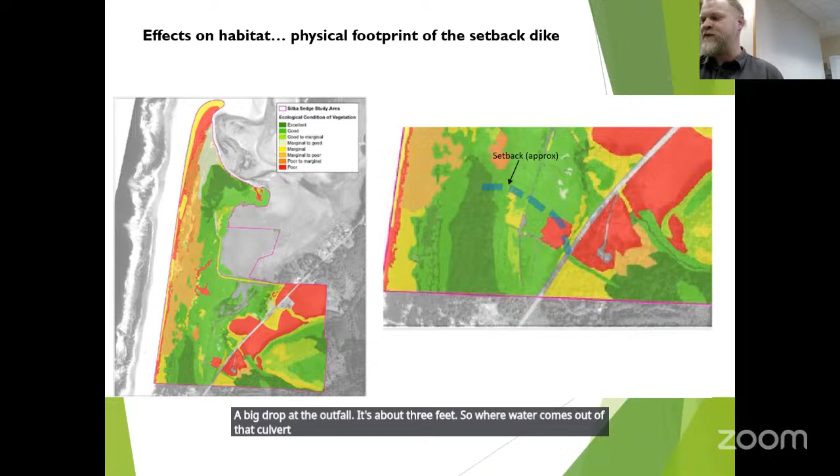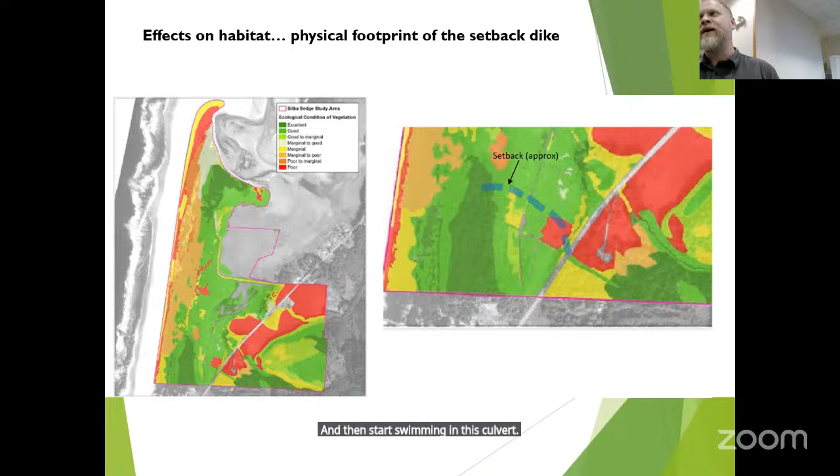And then Beltz Creek as well—I didn't talk about that much, but we are starting the design of that structure now. The existing culvert that crosses Sand Lake Road has a big perch, a big drop at the outfall, about 3 feet. So where water comes out of that culvert, it just drops 3 feet into that channel. Fish trying to make their way up to Beltz Creek would have to make a pretty big leap and then start swimming in this culvert. So that'll be one of the main reasons for upsizing that structure there. Yeah, thank you.

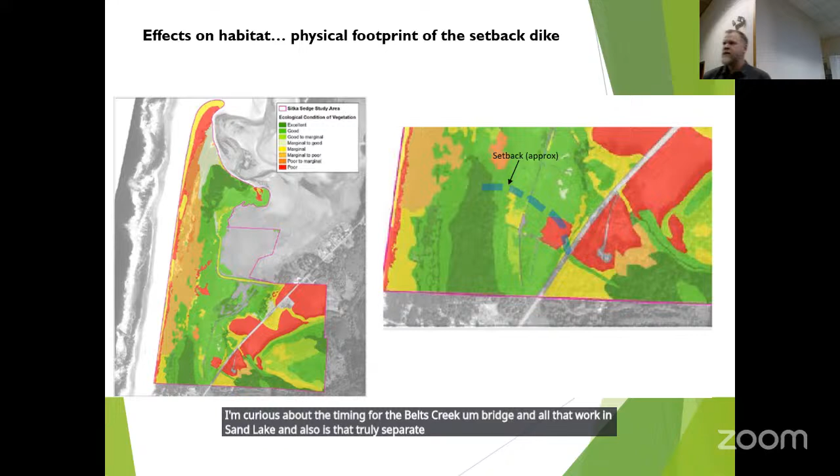I have a question, maybe for Chris if he's still here. I'm curious about the timing for the Belts Creek bridge and all that work in Sand Lake. Also, is that truly separate funding-wise and project progress-wise from the rest of this? Will that happen regardless of what happens with the rest of the dike restoration?

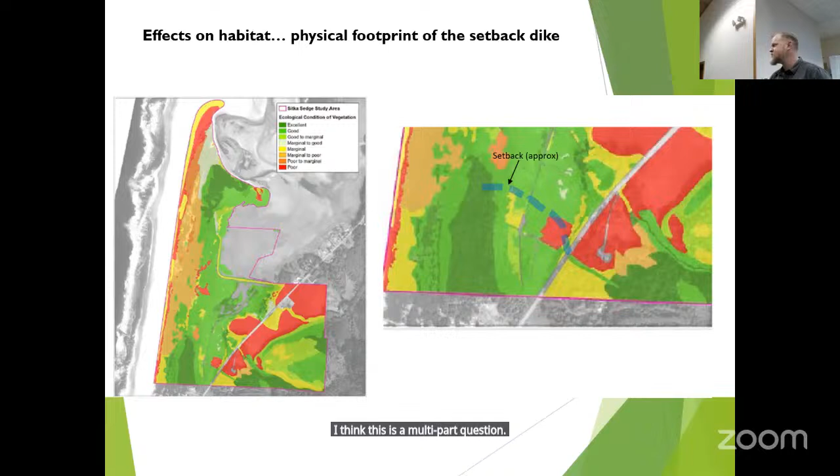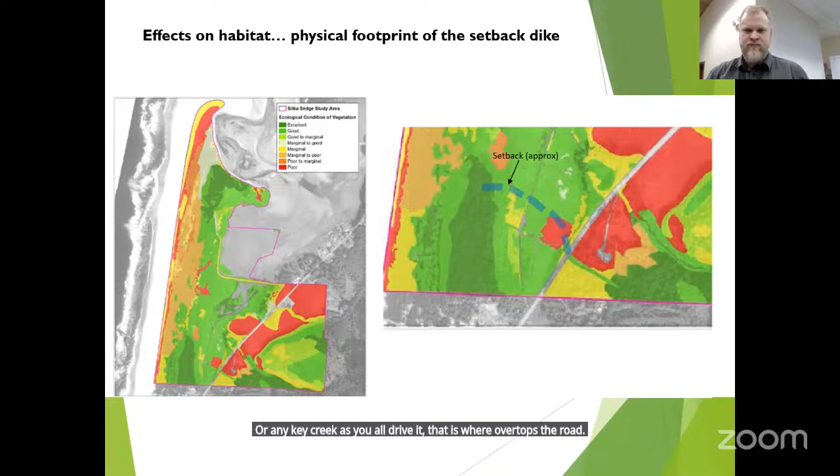I think this is a multi-part question. The county is seeking concurrent funding from federal highways for Reneke Creek. Reneke Creek, as you all drive it, is where it overtops the road—every single year it just continues to eat up the side of the road. Belts Creek is further up.

Thank you, well that makes it easier. We are going concurrent with this. We've applied for a federal highway aquatic organism passage grant for that. I've asked to try to separate the environmental process out—the NEPA process, National Environmental Policy Act, which would go through cultural review and everything else. There's a point where we went concurrent with the dike, which makes sense, but we also want to continue to push really hard because I can replace that bridge, which is why we funded that 30% design—so we have enough information to apply for grant funding. Hopefully, knock on wood, we'll get grant funding for that. So if we can build that before the dike, absolutely, we're going to build it before the dike.

Yeah, and just to add to that—I mentioned combining these projects, and that was really so our team can work on this all together, and also to utilize some of TEP's grant funding that they've obtained to continue advancing Reneke Creek. But as Chris was just saying, there may become a point where we can get Reneke Creek done faster, obtain construction funding quicker, and we may break that off to complete it separately.

Any other questions?

I'm wondering again about funding. Is NOAA your primary source of funding, and how do you see it going forward, given that NOAA seems to be at risk of being shut down? Where are your grants coming from—are they all coming from NOAA, or elsewhere?